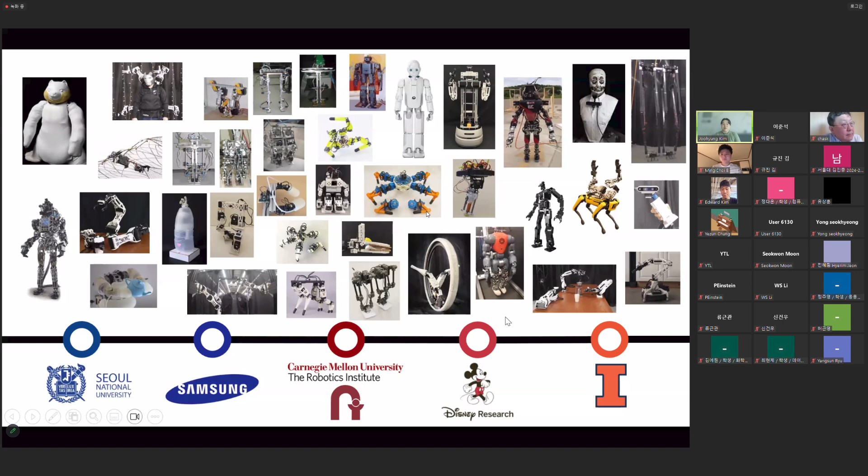So I will skip this part. These are the robots I've been building. Most of them are from scratch, but there are some other robots from Boston Dynamics or IIT, Italian Institute of Technology, or Disney Research. But most of these are systems I've been building from scratch with my team.

So these are the contents. I will briefly explain what a humanoid is and why people are so interested in humanoids now, along with the history of the humanoid, what the current advances in humanoid technology are, and what the goal is. There is a very specific goal market for now that all the humanoid companies are pursuing. So I will explain that part a little bit, and I will explain the research opportunities and what I'm doing now.

The word humanoid itself is actually from Greek. This "oid" actually means having the form or likeness of something. So humanoid itself is literally human-like things. That's why we use this word for artificial, human-shaped creatures.

And there are many similarities in the shape configuration. A humanoid has a head, 2 arms, 2 legs, and a body. But inside the humanoid body, the location of important parts like computers or sensors is slightly different, mostly because we don't have enough technology to make the same functionality with the same form factor, or other issues like the power system being very different. We are still using batteries and electric motors.

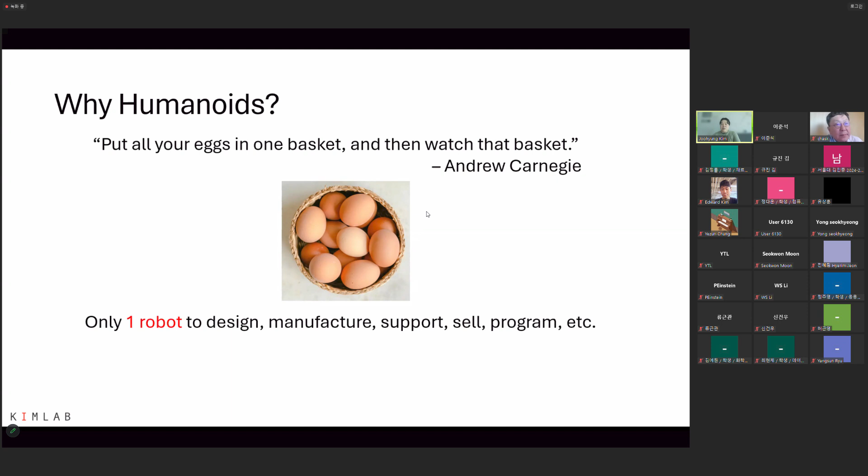Let's say you can go back to 10 years ago and you need to invest in something. Then everyone will purchase Bitcoin or Nvidia stock, right? So it's not exactly the same, but the humanoid robot is the only robot we can design, manufacture, support and use for any usage in the human environment, because it's a kind of replacement of the human. So if we can make this really well, then we can just build humanoid robots rather than any other robot. So from this approach, we are talking about general purpose.

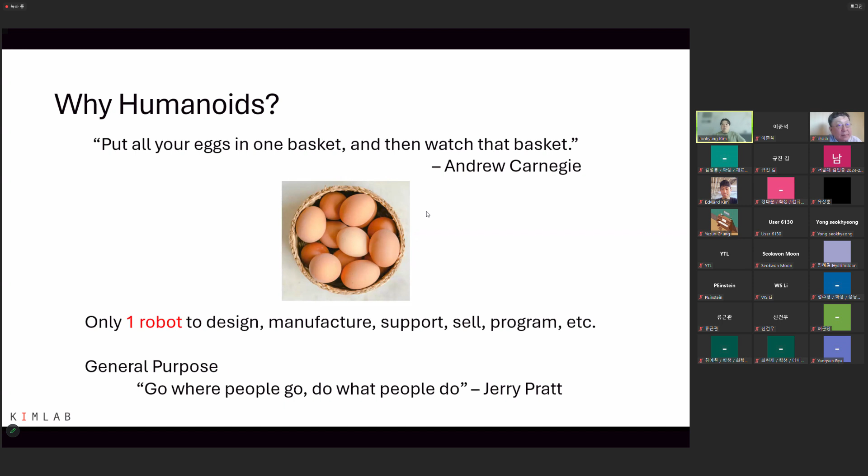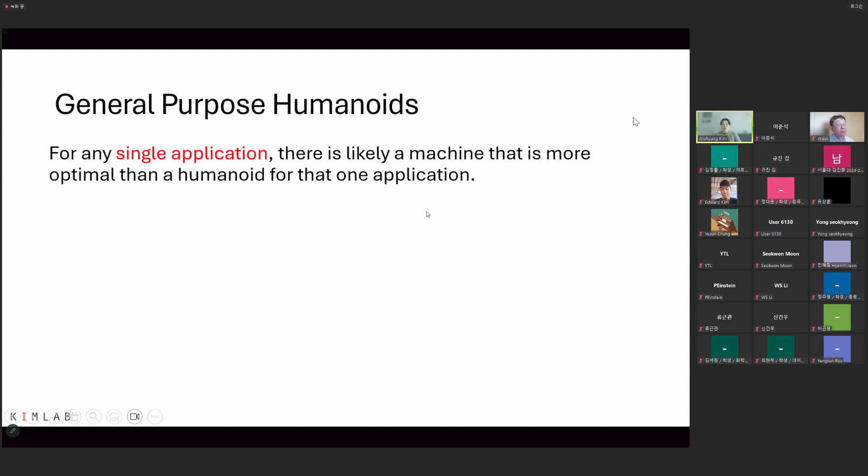General purpose means this robot can actually go where people go and can do what people do. For any single application, there is likely a machine that is more optimal than a human form. We are using these kinds of devices a lot: vacuum, dishwasher, or laundry machine. We actually cannot beat these devices for cleaning or laundry, right? But general purpose means we can use the same device for multiple purposes. So if there are several different applications, a humanoid form is likely close to an optimal single solution.

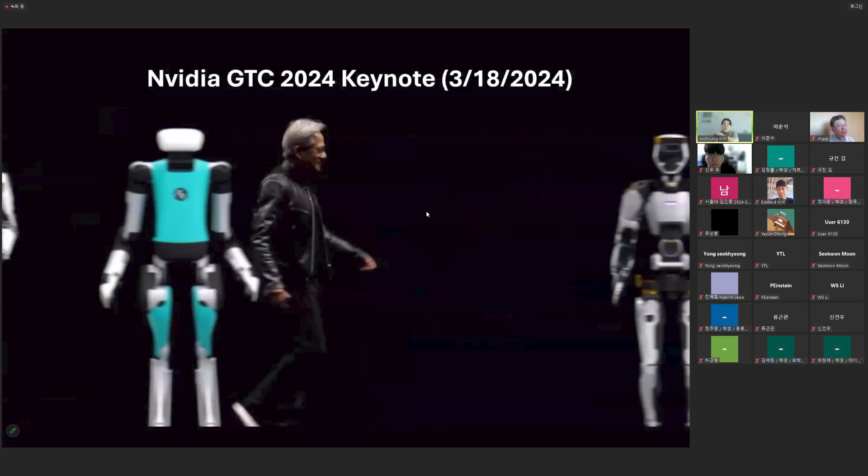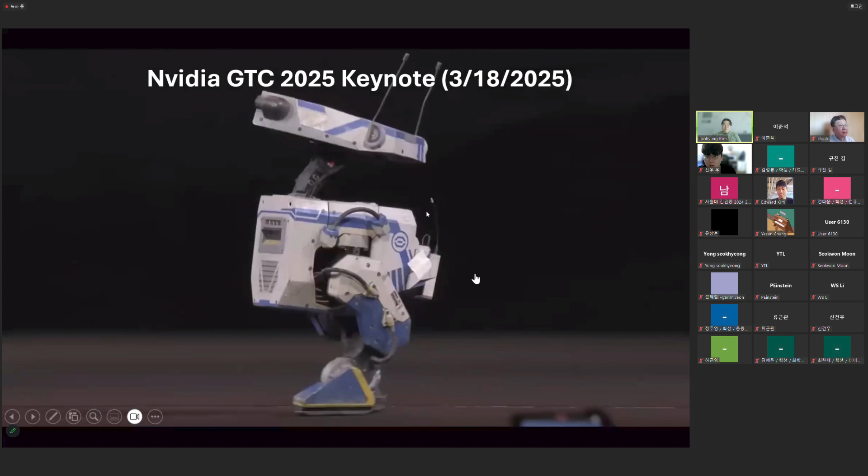So last year at GTC, Jensen Huang made this kind of scene. These were not quite fake, but these were displays. These were not actual robots behind Jensen. And this year, again, Jensen Huang brought one of the not quite humanoid, but biped robots on the stage.

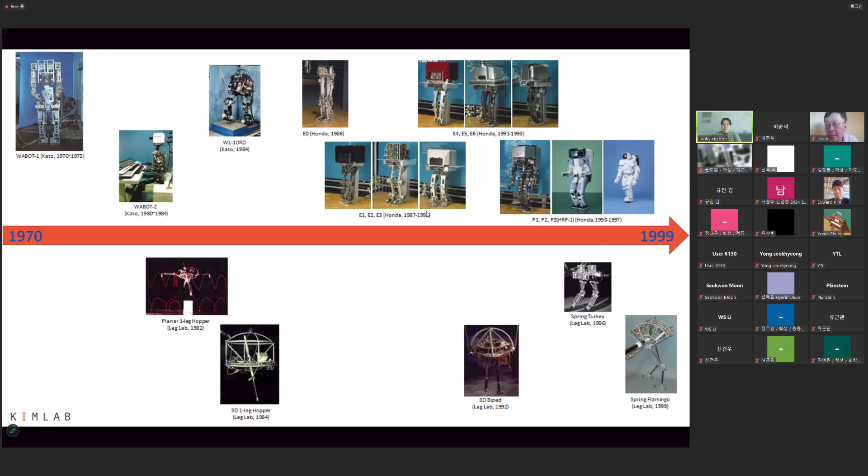From 2000, interestingly, right after ASIMO from Honda was released, lots of research institutes started developing this kind of humanoid robots. And well, the current hype is mostly because of the Optimus robot from Tesla. But I don't think this hype is directly from Elon Musk for sure. In this community, we've been building all kinds of components for humanoid development for a while, and the most important event in humanoid history, I believe, was the DARPA Robotics Challenge.

So during my Samsung Electronics days, I asked Samsung to participate in the DARPA Robotics Challenge, but Samsung didn't want to join. So that's why I actually quit the job and moved to the US in 2012. And this DARPA Robotics Challenge is very important because during it, researchers and the community realized, oh, we can actually build this kind of system with current technology.

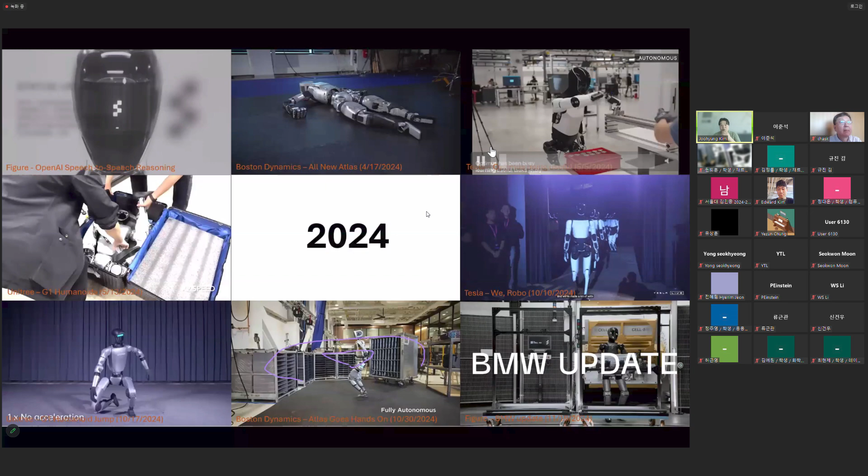So in 2024, last year, lots of companies released this kind of robot: Figure, Boston Dynamics, Tesla, Unitree, Tesla again, Unitree, Boston Dynamics, Figure. Oh, actually, these are only from 4 companies. But these are all from last year. This year, there are many more videos, but

I don't want to have too many videos because at the end of 2023, in the community, we thought, okay, there will be many more humanoid robots for the next 10 to 20 years, and we want to know what will be the next good platform we can share or use for this research.

Here's an interesting. Check. How can I remove this line? Sorry. How can I write this? Okay.

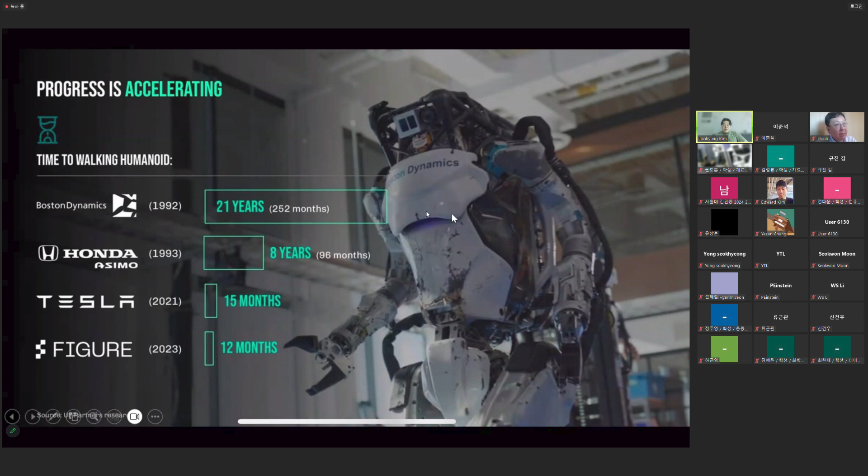So Boston Dynamics, Tesla, Figure AI, Agility Robotics, Apptronik, 1X, Sanctuary AI, Unitree Robotics, these are currently the famous humanoid companies in this field. Unitree Robotics is much more for education or research purposes for now. But all the other companies are targeting flat floor industrial jobs.

As you can see, Boston Dynamics is working with Hyundai Motors. Tesla is working on the Tesla Gigafactory, and Figure AI is collaborating with BMW and OpenAI. Agility Robotics is working with Amazon, Apptronik with Benz, and 1X is working with OpenAI. 1X is working more on home use, but still a flat floor environment, and Sanctuary AI is also working on the manufacturing line in flat floor industrial jobs.

Flat floor industrial jobs means a huge warehouse kind of environment without any stairs. Well, some height changes, but mostly flat. And the manufacturing line or logistics. So Agility Robotics is working with Amazon much more just for logistics, but car manufacturing lines also have their own logistics within the car manufacturing.

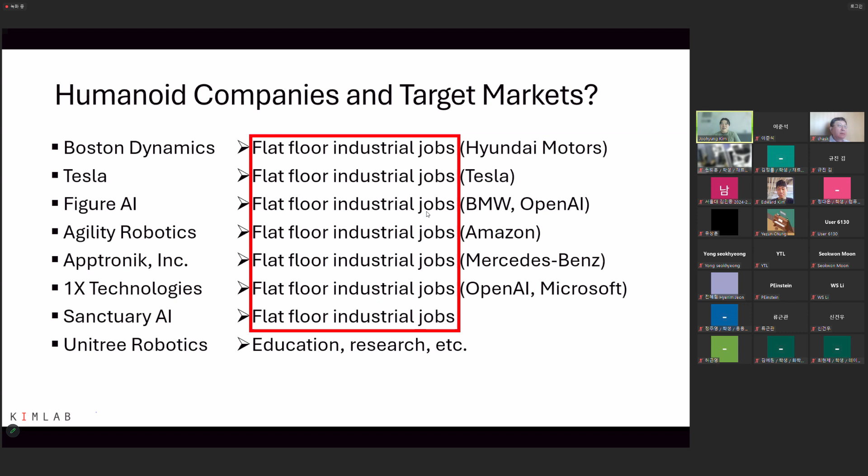So to replace that, I don't like the word replace, to replace that labor, Elon Musk started working on the humanoid robot. But frankly, it's not quite replacement for now, because especially in the US, it's very hard to find a good amount of labor. The labor shortage here in the US is severe. So that's why people think there will be a larger market for humanoid robots in the future.

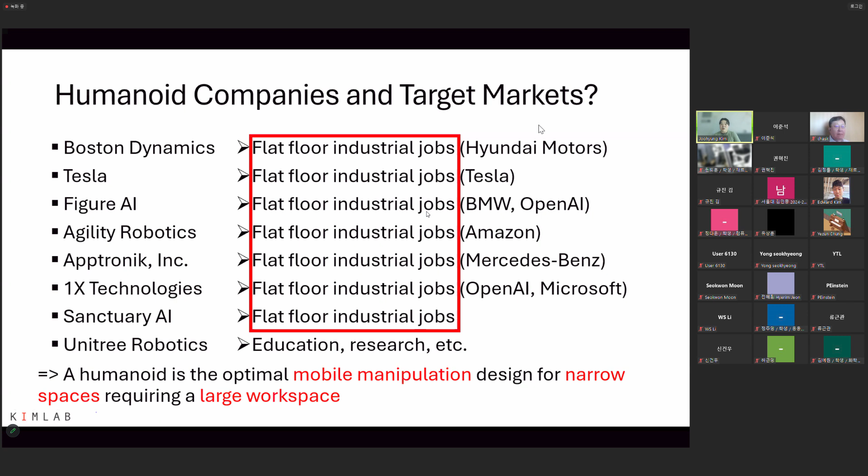So let's move on to the research topics in humanoid research. I think most of the audience today is computer science based, probably, right? All over the field. Okay. So optimal control techniques are model predictive control, or to me, reinforcement learning is also based on optimal control, just using real-time updates to make the policy more optimal.

And the second one is multimodal deep learning for perception and planning. The third one is dexterous robotic hands. The fourth one is tactile sensing. And the last one is imitation learning from human demonstration. These are currently very popular topics in humanoid research. The first two topics are more classic, making the robot do some tasks, mostly related to how to solve the task.

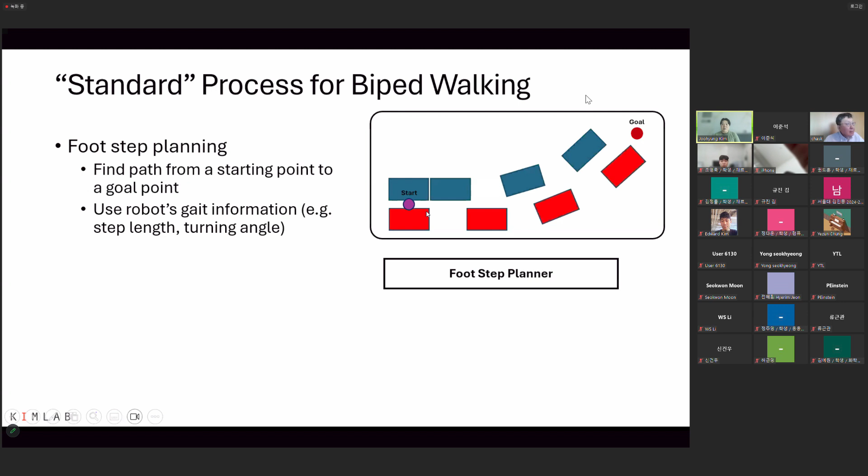And with this footstep information, we can plan the center of pressure inside the current footstep. The center of pressure should stay inside the footstep so as not to make the robot fall down. So with the footstep plan, we can find a good trajectory for the COP within the footstep.

So the next part is the interesting part. The humanoid robot is a very high dimensional system, and solving the dynamics is very hard. So researchers found a good way to solve the dynamics with a simplified model. If we assume the whole system as one mass, then we can make some kind of inverted pendulum or some template model, a low dimensional model, to solve the COM's movement to keep the center of pressure

condition, the constraints from the center of pressure trajectory from the previous layer, then we can have this purple line, which is the center of mass trajectory in 3D using this simplified model. You don't need to understand what's going on here. I just wanted to show what the process is for the motion control.

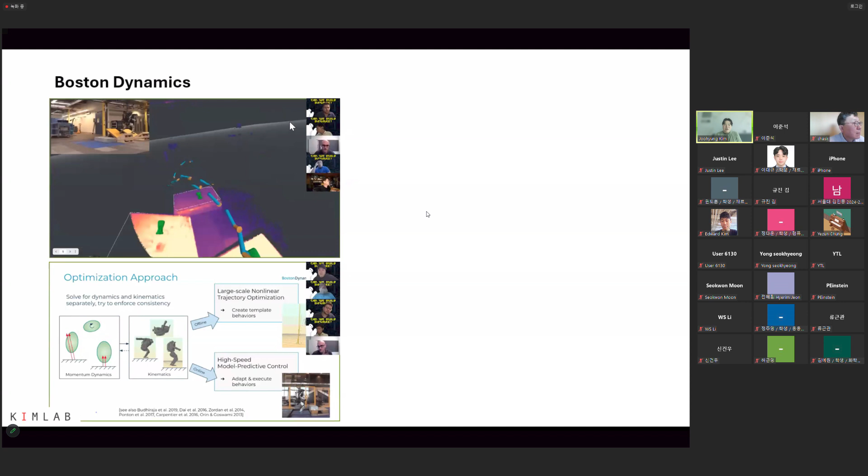That's why I started exploring a little bit of the machine learning method to solve the whole body control issues. Well, this is the Boston Dynamics robot. As you can see in this video, this one is visualizing the footstep first, then solving the COM motion like that, then the robot is moving. This is the robot point of view. So it's actually using a pretty similar method to what I introduced in the previous slide.

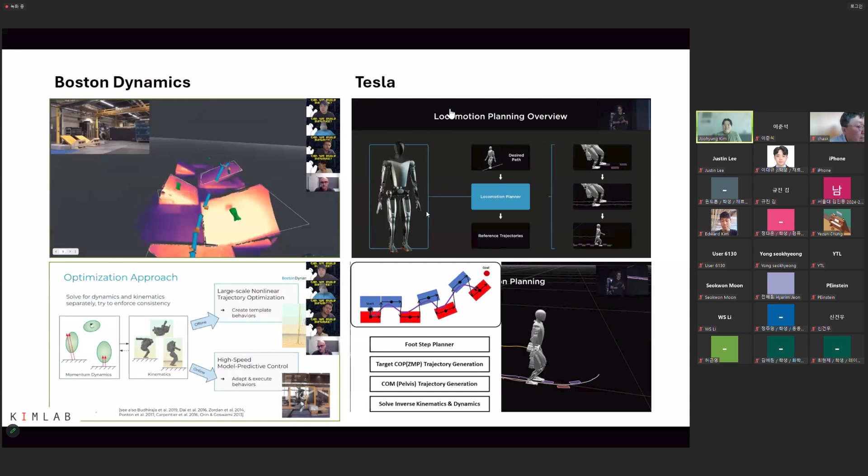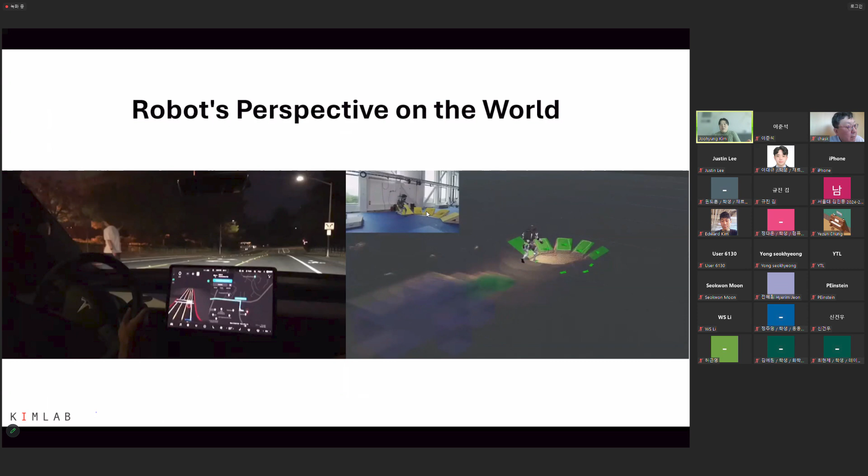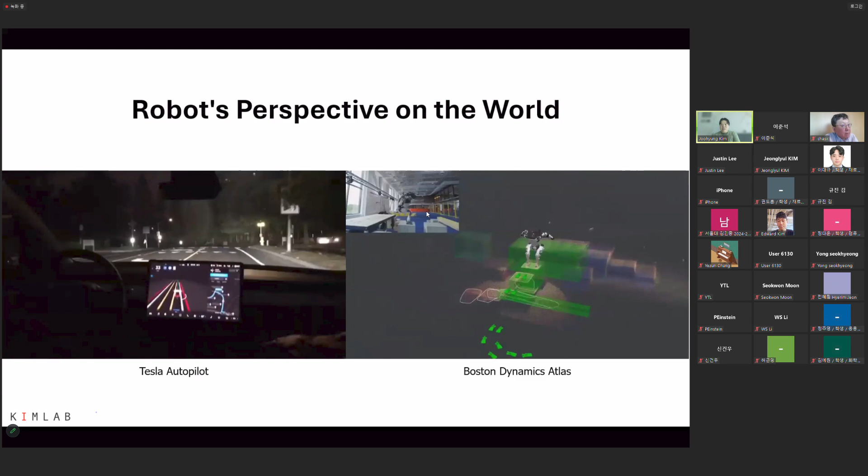So as you could see in the Boston Dynamics video, what the robot is seeing is very different from what we are seeing. We can understand what's going on there, but the left video is Tesla Autopilot. It's showing the lines and some signals for humans to understand what is going on. But the internal robot state is very unclear to me. We don't actually need to understand it. If the robot is working well, then that is fine. But for some safety reasons, we actually need to show this kind of thing for humans to understand what's going on, right?

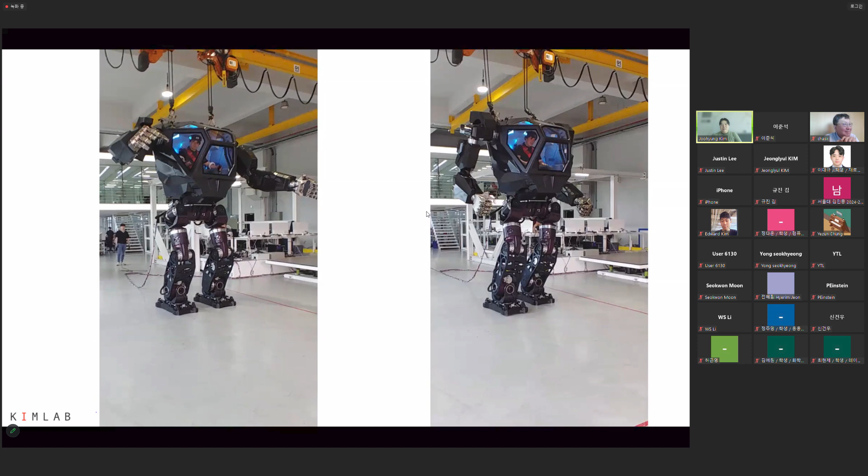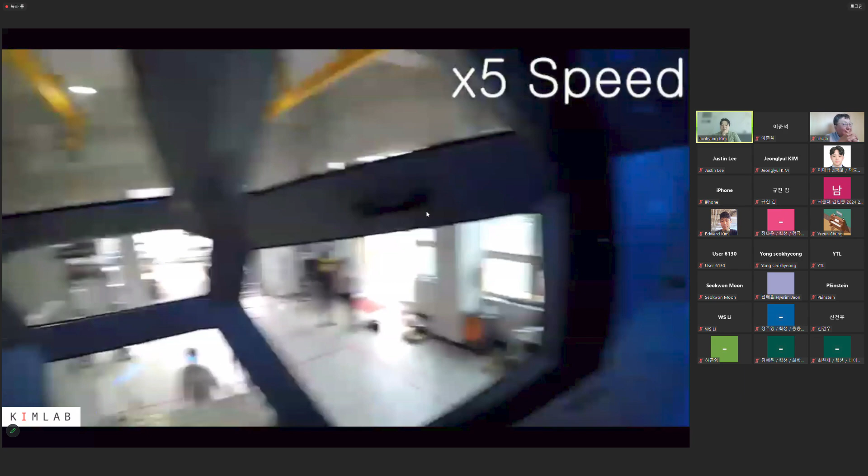So I had a chance to ride this huge robot. It's about a 4 meter full body humanoid robot, and inside, the pilot is actually me. I wanted to show this video. I was wearing a GoPro, and this is the inside. And now it's moving. With only vision, well, this is a very limited field of view, so it's very hard to see anything. I couldn't even see the leg or arm of the robot with this vision. But it's something like this.

If we build the system with limited degrees of freedom or some constraint, the world the robot is seeing is very different from what we are expecting. So how to have some other perception modality, or how to design this perception for the robot, is very important for robot safety and for humans understanding what's going on here. So that's related to the hand and the tactile and the human demonstration. I think these are more interesting topics for you too.

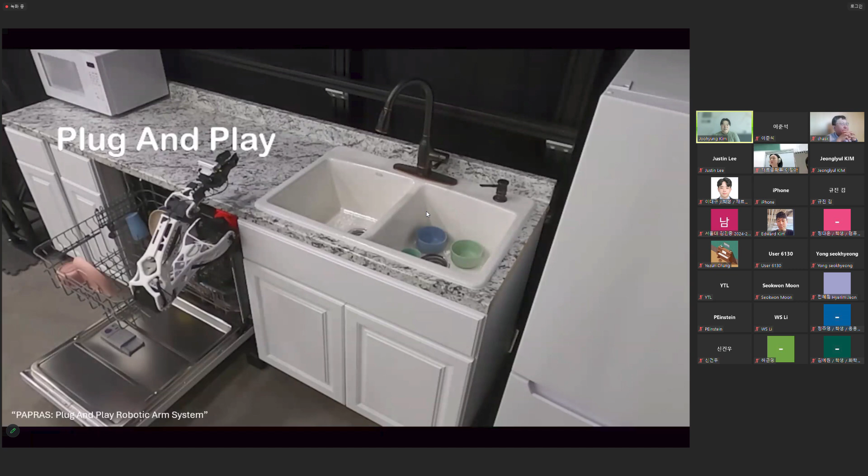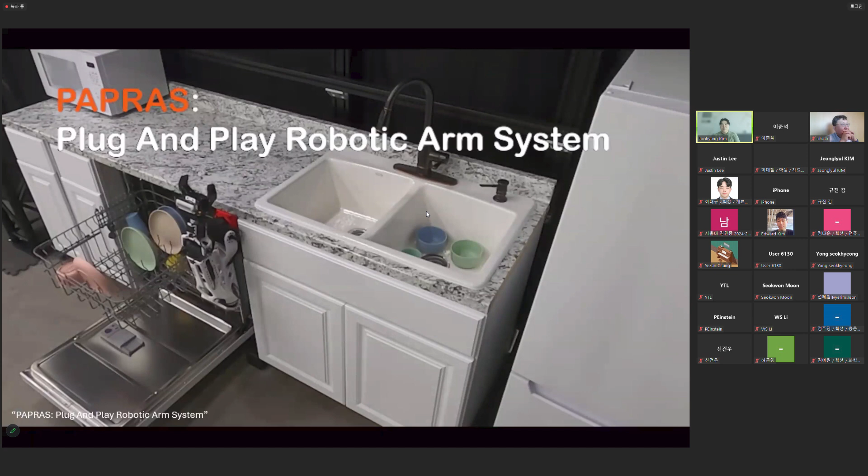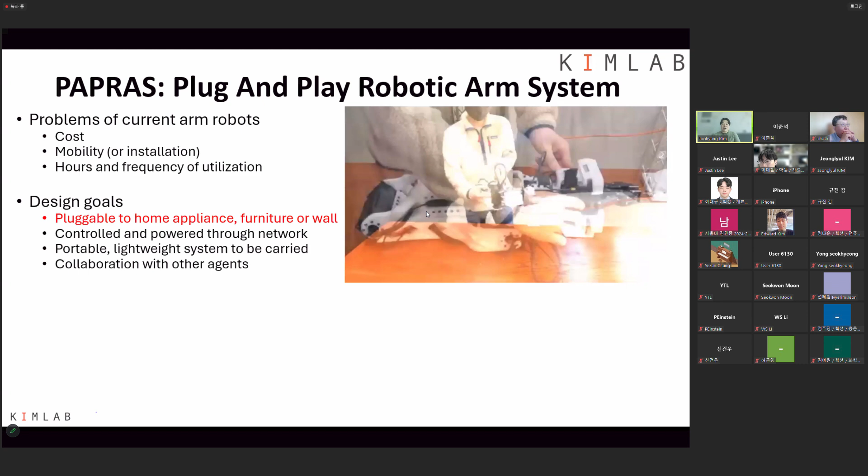So I started building an interesting system, a plug and play robotic arm system. Last time I had a presentation with the data science department, I just introduced this part, but in this slide I have some more content about how to collect or how to control this data with human demonstration. So the plug and play robotic arm system is literally a plug and play robotic arm system. I really wanted to deploy more robots to collect more data for different applications. And robotic arm systems are very expensive.

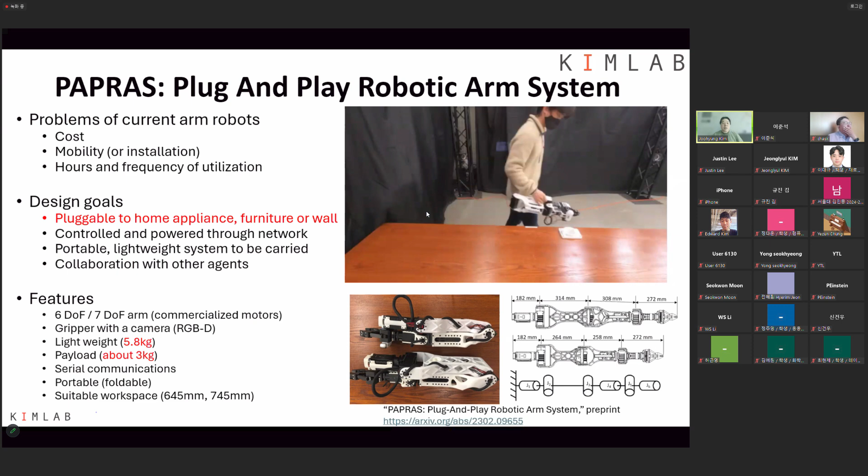So if you want up to 2 to 3 kilogram payload with 6 degrees of freedom, it's usually like $50,000 and also very heavy. It's usually 12 to 15 kilograms. So I decided to develop our own system, which is under 6 kilograms with the same payload, up to about 3 kilograms, and can be plugged into a docking mount we designed.

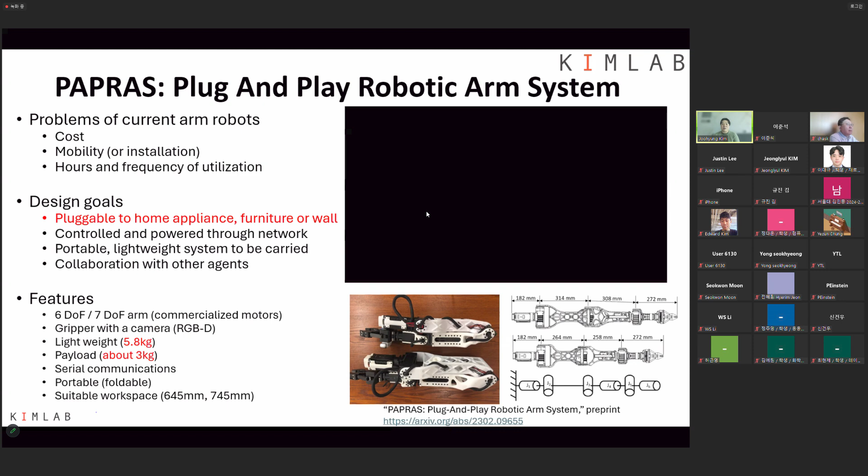That's the important part. If we want to deploy this robot to any system, we actually need to have this docking mount everywhere. But we are now using the USB port for the power and communication. So in the future, if there's a standard for the docking mount, I think we can share any kind of robotic arm system or robotic system through that kind of docking mount. So I wanted to spread that idea to this community. This one is just showing the payload.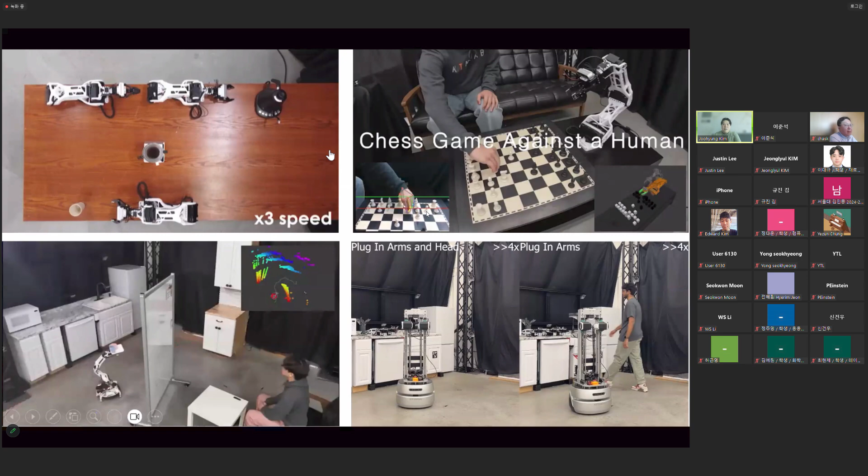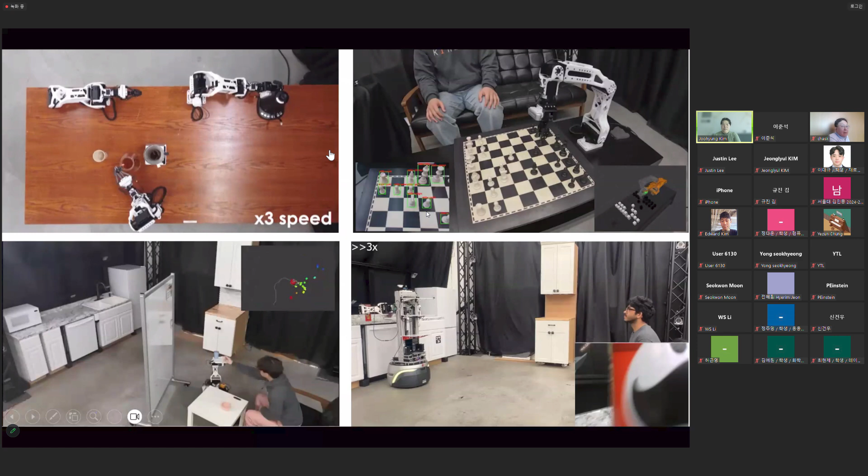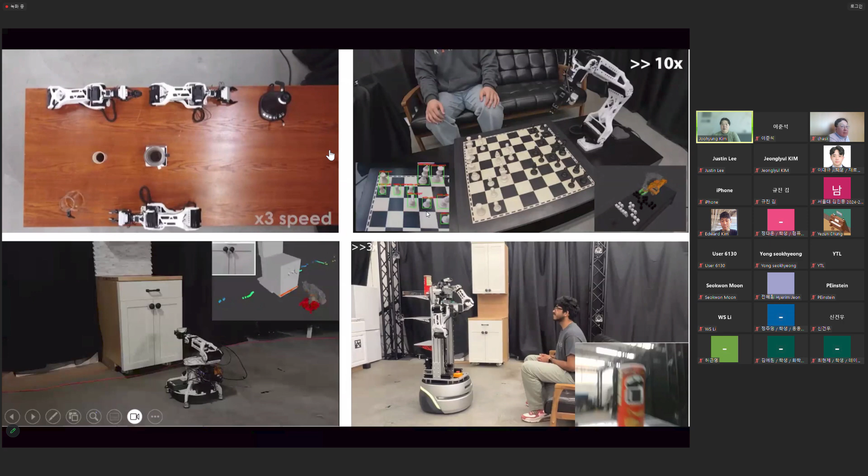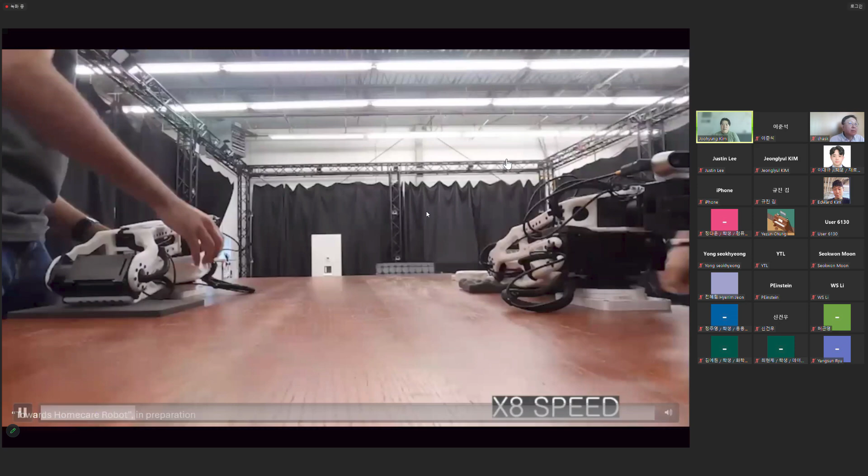So my solution is I wanted to use my system, the plug and play robotic arm system. So we use our system everywhere. This is my lab, and these are fully automated demos. So robots actually can tell what is the target task based on the location. Then using perception, it can actually do the given task in every location, cleaning and moving things, or helping people to wear a jacket.

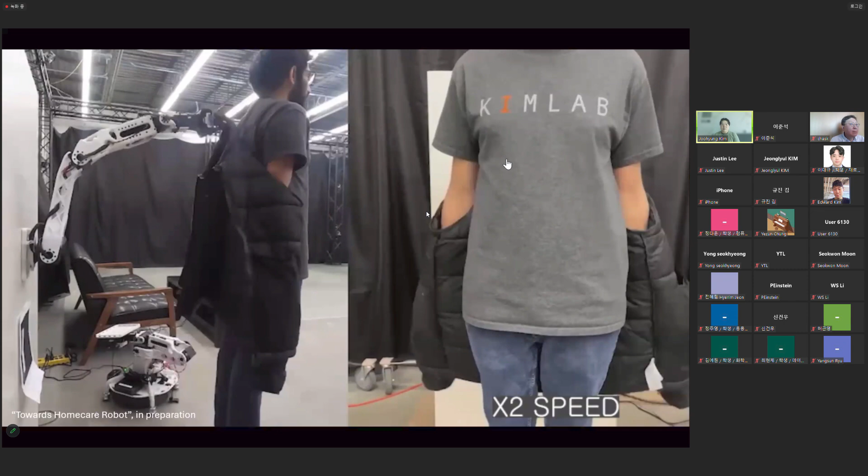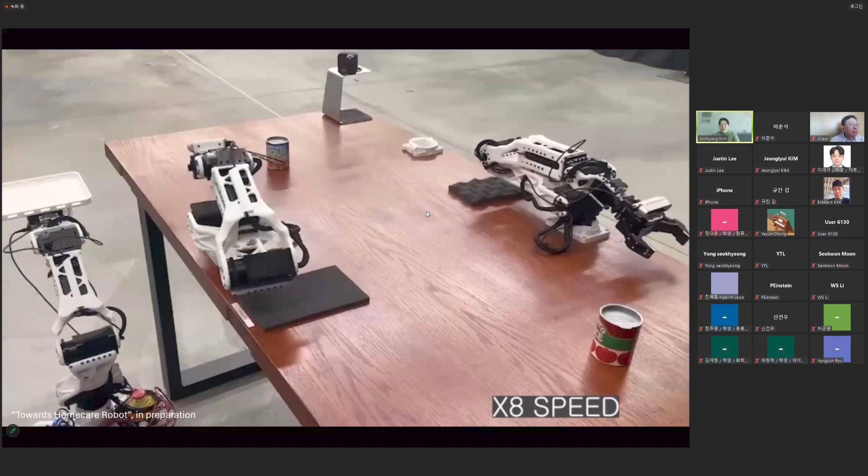So this is all model-based. There's no learning at all. This is classic robotics research. But what I really wanted to do, to solve all kinds of tasks, is to collect the data, not just to use data-driven methods. For all engineering solutions, the starting point should be data collection, to understand what the environment is and what the possible solutions would be for this kind of task.

Isaac is the simulation side, so we can generate augmented data in simulation, which is very important to know whether this task solution is feasible or not, or getting some data through the augmented environment. And everyone knows we have enough text data and video data for many kinds of tasks, all the kinds of tasks humans are doing, right?

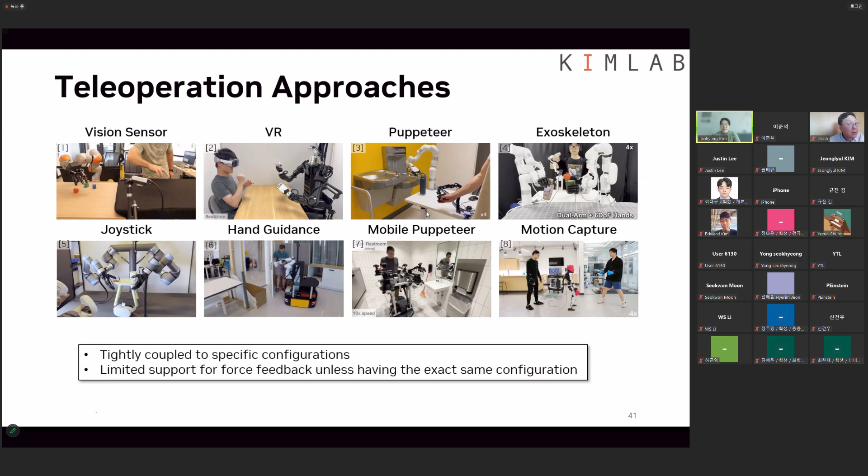Current state-of-the-art methods, these are very recent papers, are still tightly coupled to specific configurations and have limited support for force feedback, which is important. We need to add more perception modalities to collect this physical body environment data.

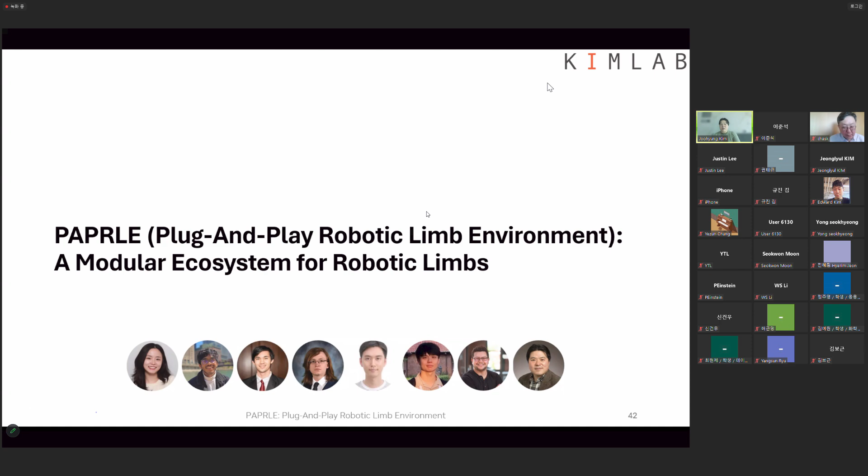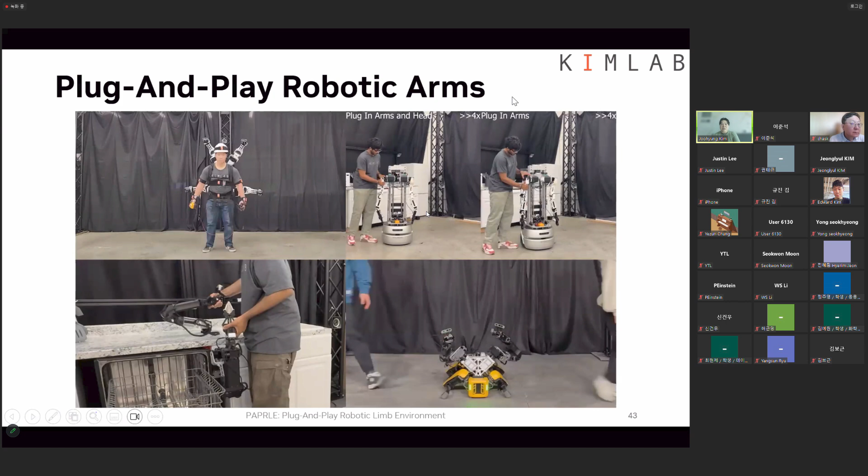So we also moved on from PAPRAS, the plug-and-play robotic arm system, to a robotic limb environment for this modular ecosystem. These are the arms we can attach, introduced in previous slides. And now we have the controller. We now call this a leader and follower system.

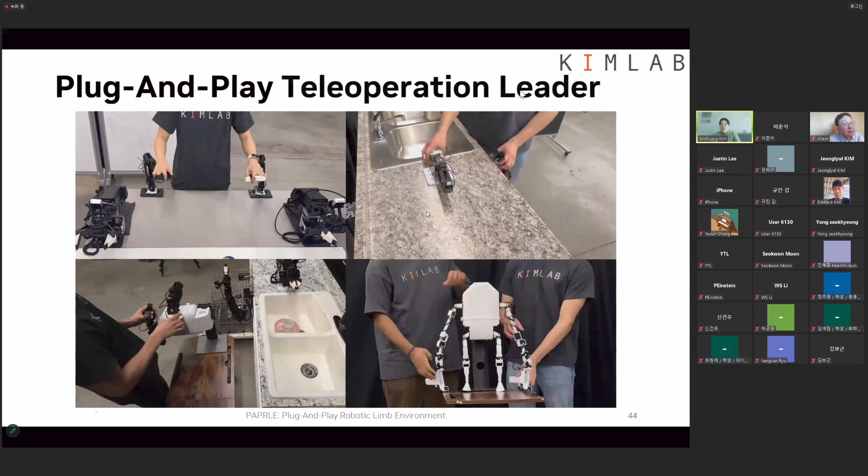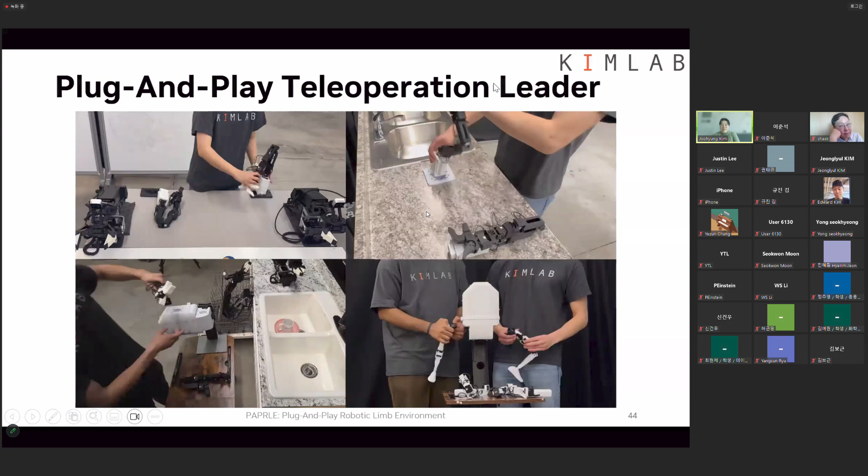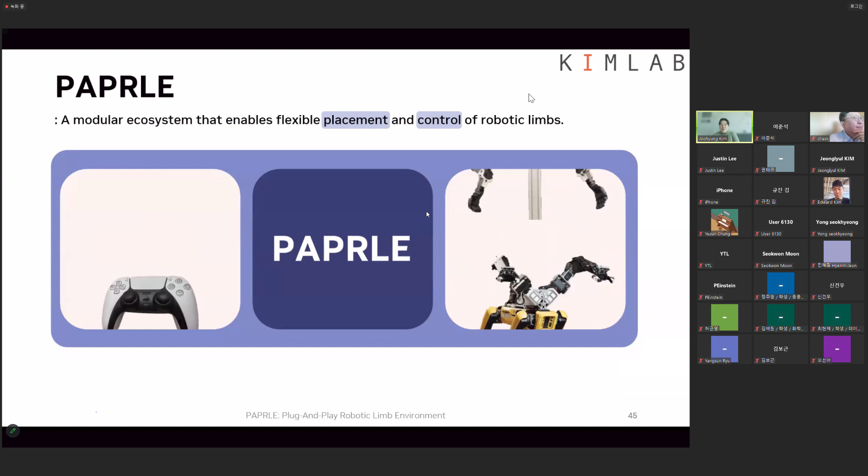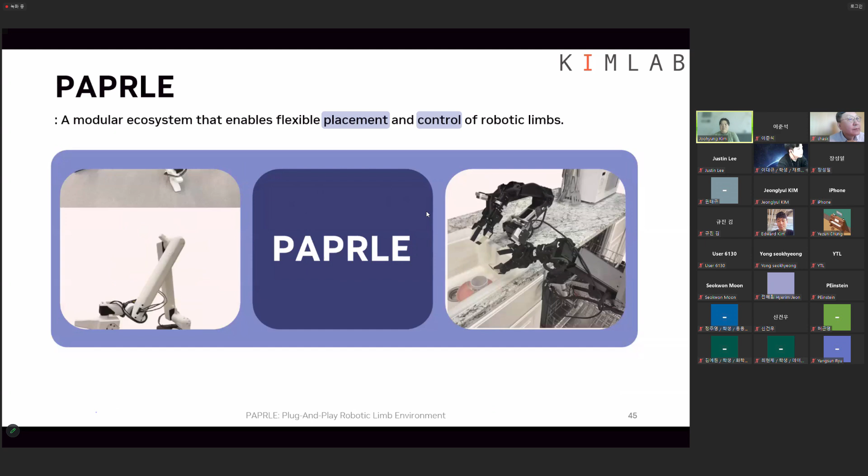In the old days we used this kind of system as a master-slave system, but because of these historical issues, even in this robotics field, we are not using master-slave anymore. So we call this system leader and follower. So this is the leader system for our PAPRAS, the plug and play robotic arm system. So what our pipeline is doing is, with any leader, we can actually control the follower system.

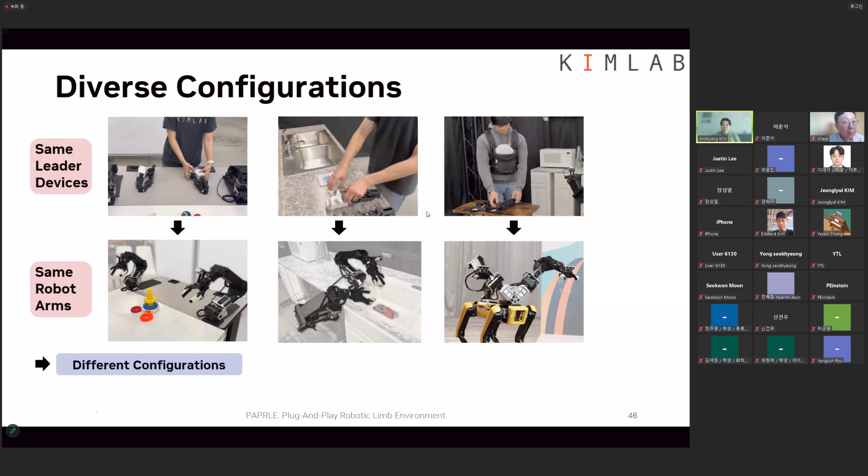Okay. So we can use the same leader devices for the same robotic arms, meaning the configuration itself for the tabletop task or kitchen task or mobile manipulator, we can use the same arms on top of this environment using the same leaders. So PAPRLE is supporting this kind of diverse configurations.

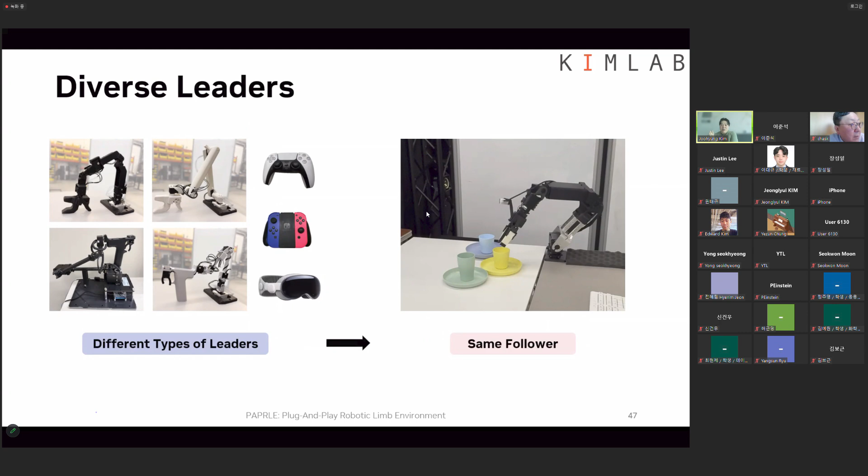And we can also use different leaders, joysticks, or different leaders with different configurations to control the same follower, same arms, or different arms. So this is the pipeline. I think if you don't have robotics knowledge, it's slightly hard to understand. So from the leaders, we can get the command in joint level or end effector level. End effector is the gripper.

So through the kinematic information or VR, so Apple Vision Pro is giving you the human wrist joint pose, position and orientation, and all the finger movement. So we can use that kind of information in our pipeline for the teleoperation. So EEF pose means end effector pose, or joint position.

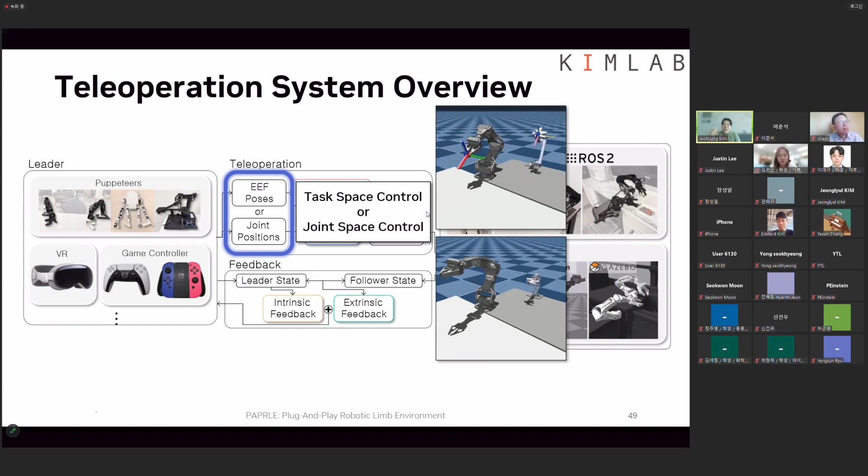Using that, we can do task space control or joint space control. So joint space control is using the joint signal for the control. Task space control is end effector control. And using some robotics knowledge and the model, we can solve the inverse kinematics, and then we need to have some kind of safety filtering.

It's not just a low pass filter kind of filtering, to check if there's any collision we are expecting from the model and the environment. We can block all those kinds of areas using the model. Then there's some other safety filtering based on the robot's capability. So if the leader operator is moving too fast, then we need to send a little slower command to the robot for the robot safety.

From this command, we can send all the commands to the follower, the target robots in real world, through ROS 1 and ROS 2, or simulation. We are supporting MuJoCo or Isaac Sim or Gazebo, and these are the most popular simulators in the robotics field.

Then for feedback from the robot side, we can get the follower state for the intrinsic feedback and the extrinsic feedback for the user to feel what's going on through the system. It's not just seen by users, seen by operators. Through the system, we can actually give feedback if there's a kinematic body in the leader side.

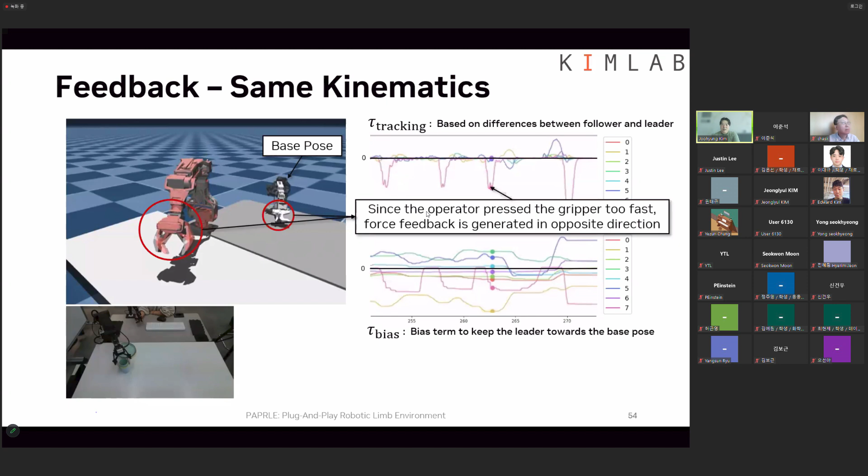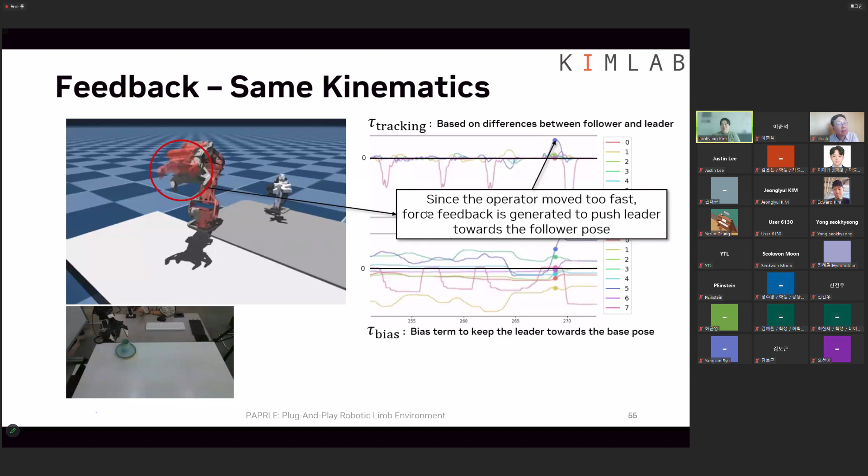So this is very simple and straightforward, but having this kind of force information in this teleoperation system is not easy. So adding this kind of force level modality into the physical system for the teleoperation, that's a very important part, and everyone is working on this.

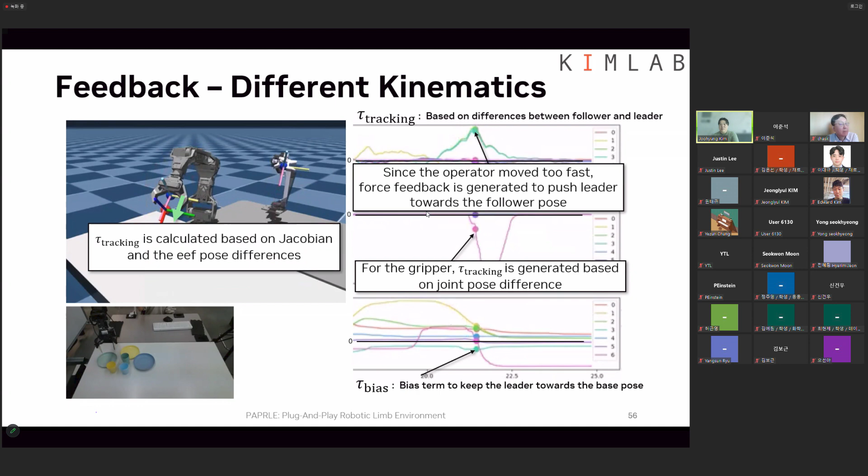And when the leader and the follower have different configurations, it's a little bit hard to see, but the leader, the control part, the configuration is different from the follower. So we can add this force feedback in this kind of case through our new pipeline.

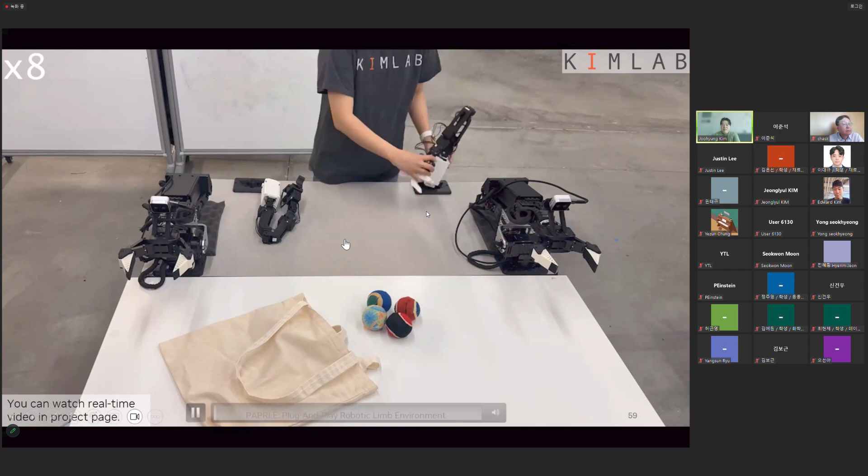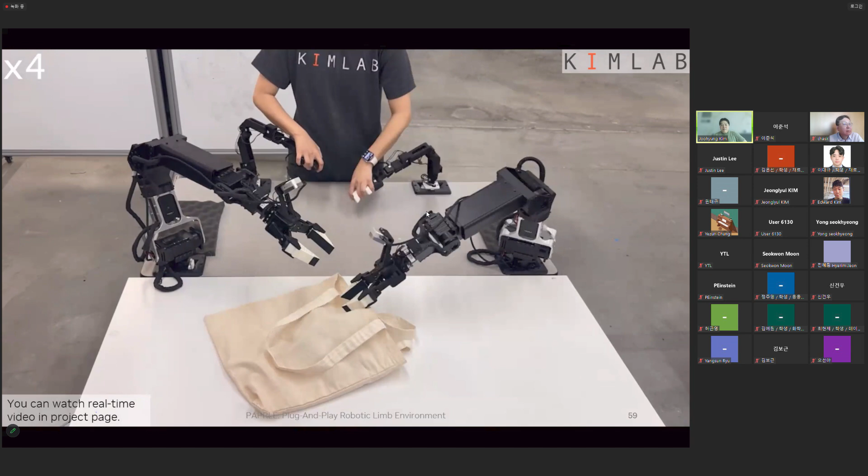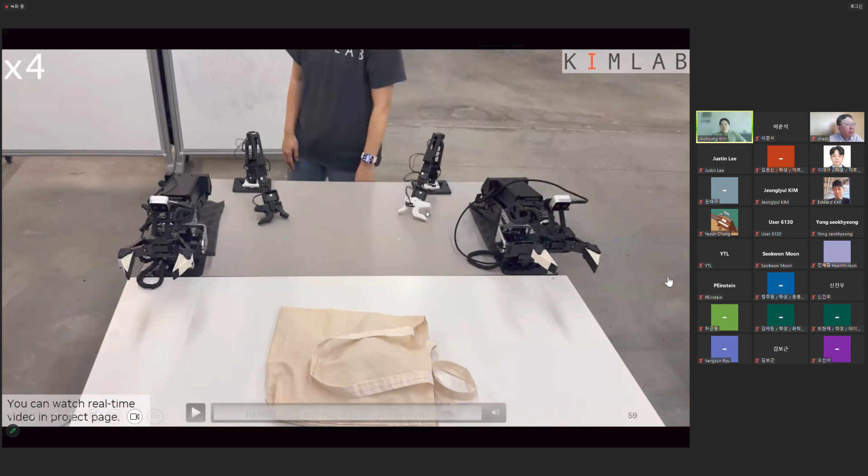I can show you what the leader side is and how we can collect the data through this kind of test. So this is the dual-arm manipulation through the teleoperation. And if you are interested in the robotics side or physical AI, you probably saw the PI, the Physical Intelligence video. They are collecting this kind of data a lot using their own system.

And I've been talking with them about the teleoperation system a lot, and I know what the current needs are in that kind of industry. So how to use different data in the leader side for the robot is important. That's why we made this diverse, different data set, different representation for the motion side, to control the robot. This is the important part for the data collection for now.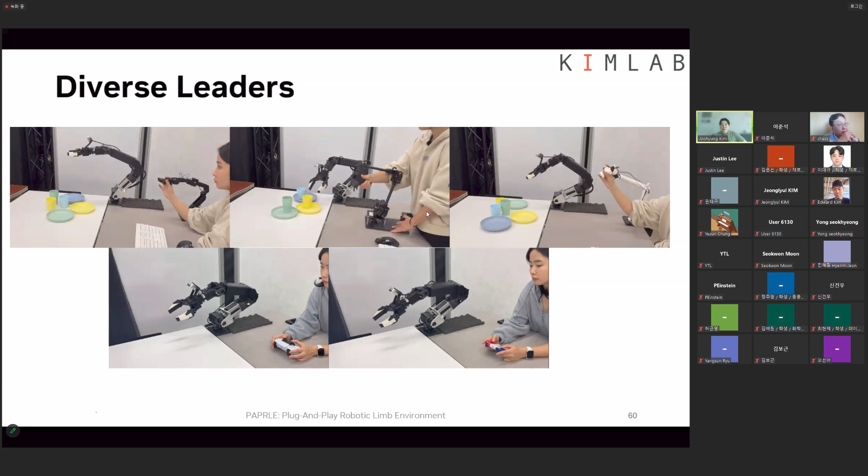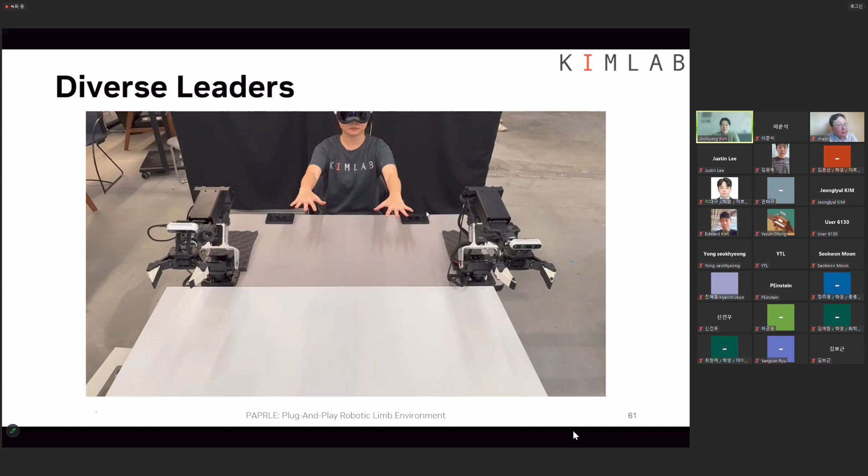And oh, oops, sorry. This one is showing the operator is wearing. Why is this one not working? Wait a second. My computer is kind of frozen now. Give me one second. Do you hear me? Yes. My computer is frozen now somehow. Okay, while I'm working on this, I can take some questions. PowerPoint, yeah. I think it will take a couple of minutes. So if there's any question, I can take some questions. Maybe it's getting close to the end of the seminar. Right, any questions? This is an excellent talk, covering a lot of things, also a very friendly introduction to humanoids. Thank you.

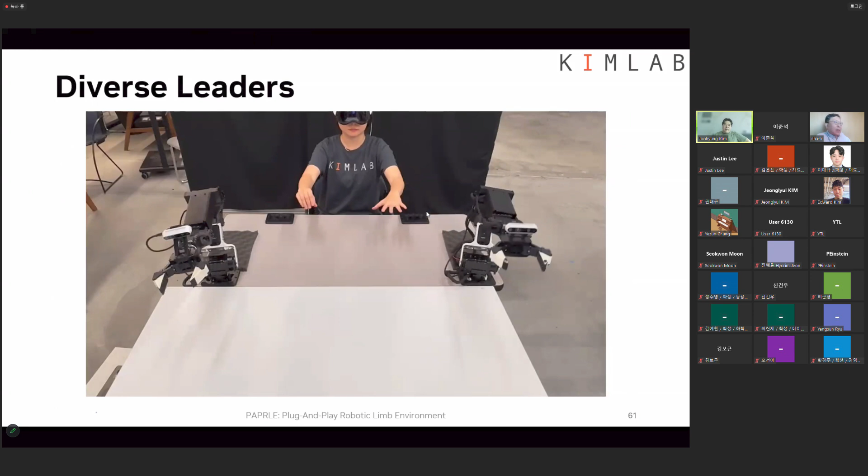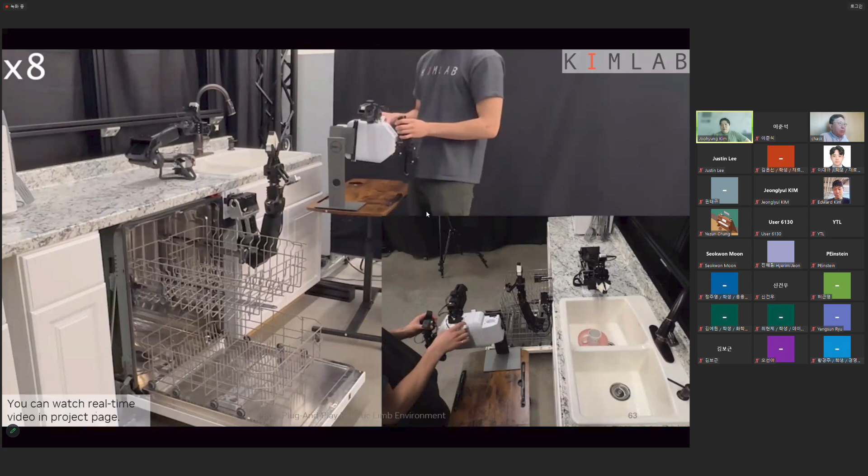Okay, are you seeing this video now? Yes. Okay, so this is the Apple Vision Pro interface. So this is real time: when the operator is squeezing the end effector, the parallel gripper is actually closing for the manipulation. And for the PAPRAS arm, we can have different configurations for the operator to control this right next to the robot system.

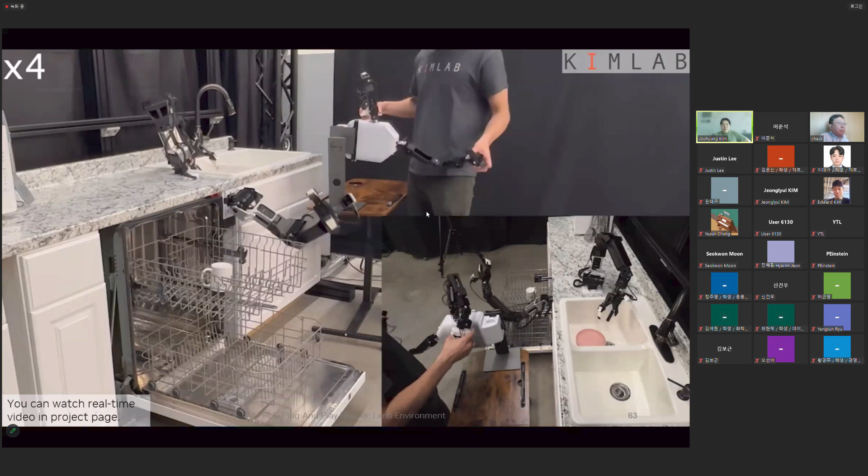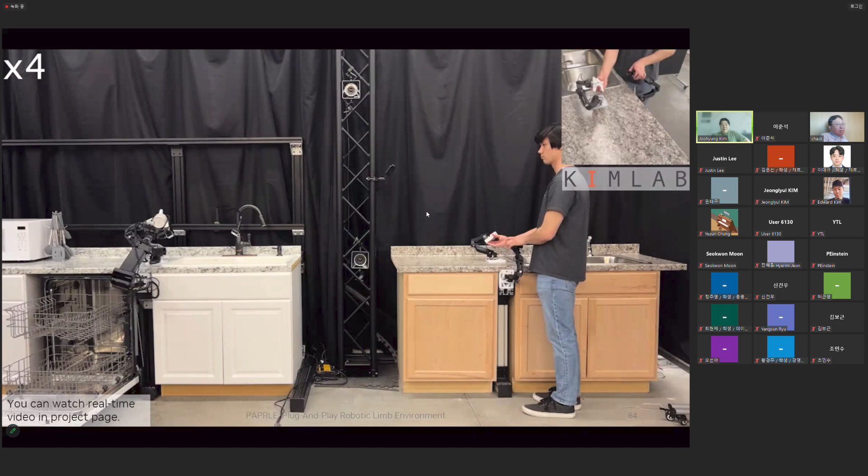Or now we have two kitchen settings, so the operator can just imagine what the environment is with the same setting, like that. And this is a new device using the baby carrier to control the humanoid robot.

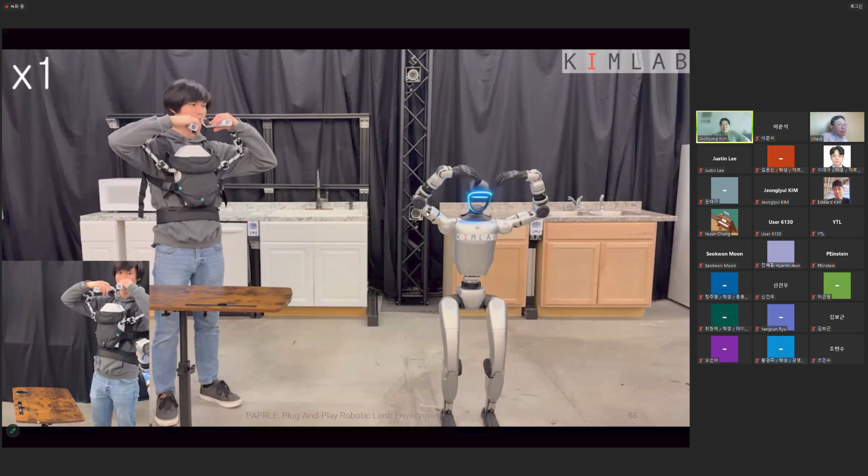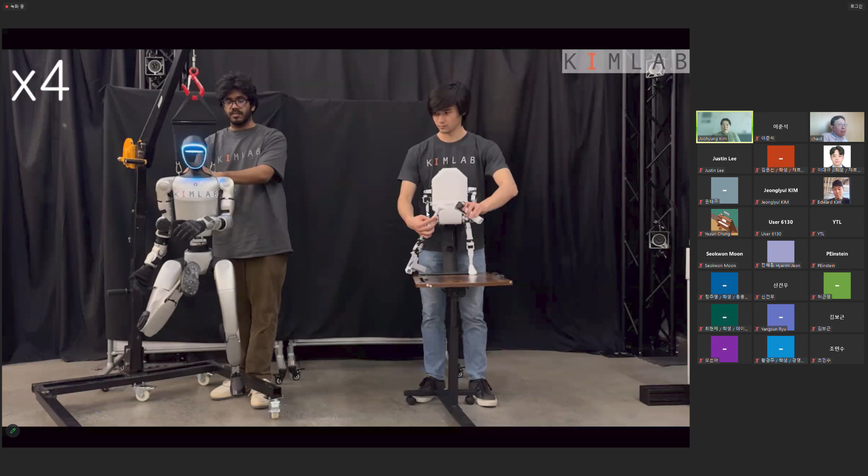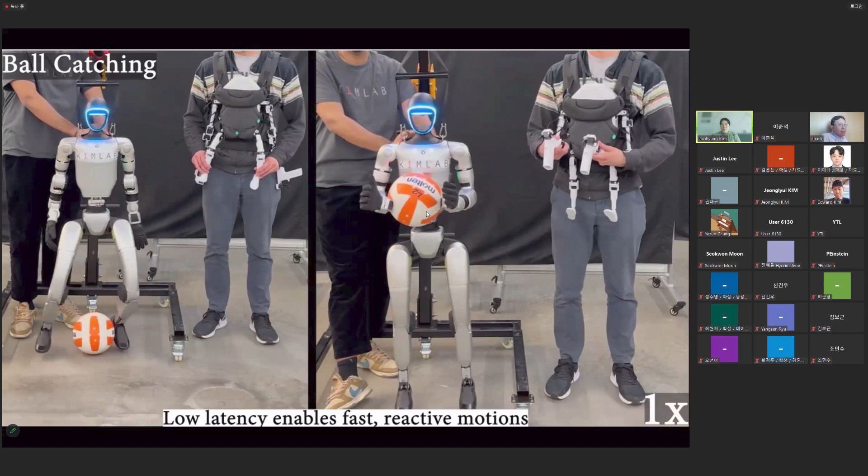So most parents, I think, have that experience of moving their babies in the baby carrier to mimic some kind of motion. So we can actually collect the data through this kind of device right next to the robot for the teleoperation. And the latency is pretty okay, so we can do very reactive motion using the system. And we can also use this one for different configurations like this.

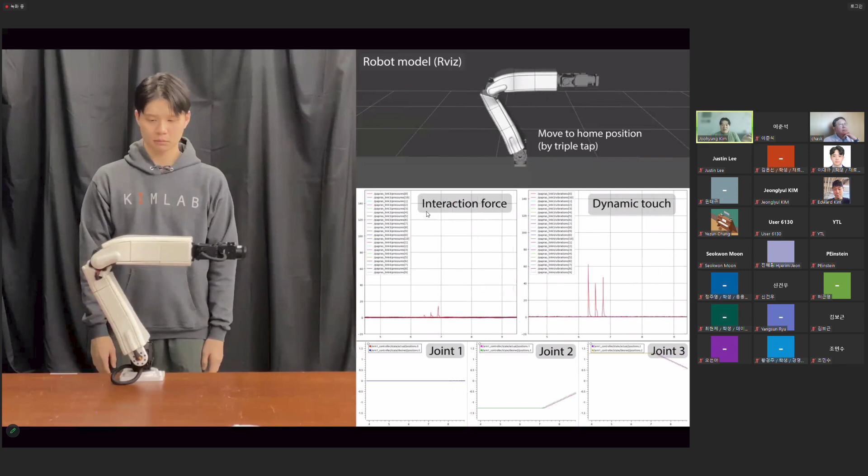I think I am going to skip this part because it's more about the tactile sensing we are developing on top of our system, or the dexterous hand to collect more data, including the tactiles. So if you are interested in this kind of thing, you can check our YouTube channel and the papers.

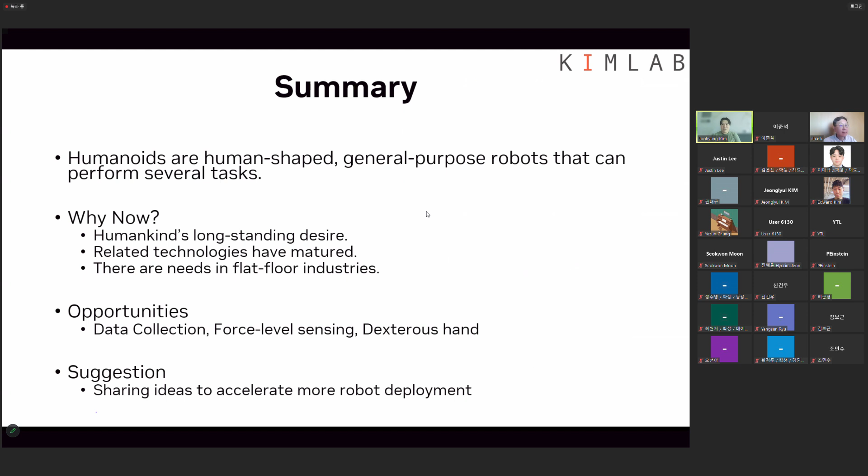So I really want to get some questions, so I want to just close my talk. In this presentation, I briefly explained what the humanoid robot is, what the history is, why people are so interested in humanoid robots now, and what the opportunities are in humanoid research. Okay, that's it.

Okay, thank you very much for a really friendly introduction to humanoids. I think even those who do not understand mechanical engineering can understand what is important in this research. Any questions from the audience?

Can I ask one question? Can you share any information about what NVIDIA and World Labs, Fei-Fei Li's World Labs, these companies are doing at the moment? What's the current state of the art, and what kind of environment do we need to build to do competitive research?

So, that's a good question. I don't know what will be the competitive research, but I know what the intention of NVIDIA is for sure. Because when machine learning became very hot, almost 10 years ago, NVIDIA was spending some time to develop the software pipeline and everything. And they said that they would support this community, but after some time, after other tools like PyTorch came out, NVIDIA stopped developing those kinds of tools and just focused on developing better GPUs, right?